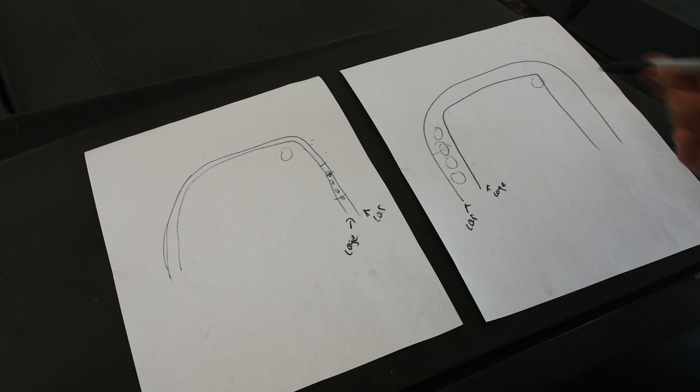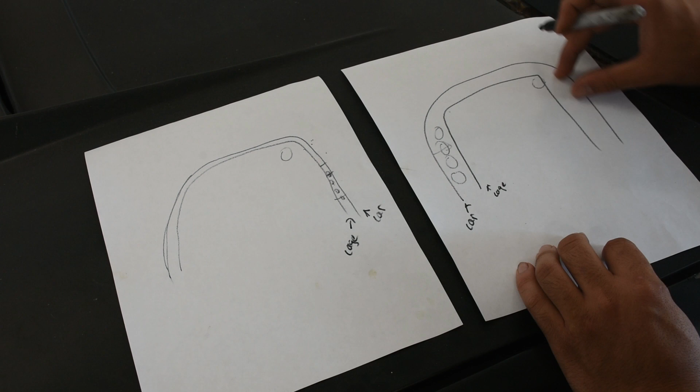Number two, as far as the rigidity of the car, if you're having a big gap over here and you have to cover it with these huge dimple die gussets, which, by the way, not to point any fingers, but a lot of you guys think huge dimple die gussets are cool, but it's the opposite. When you see huge dimple die gussets on a main hoop, you know that cage fits horribly. The smaller your dimple die gussets, the better it is, because that means the tighter the cage is fitting. And of course, the tighter it fits, the smaller the gusset. The smaller the gusset is, the stronger it's going to end up being.

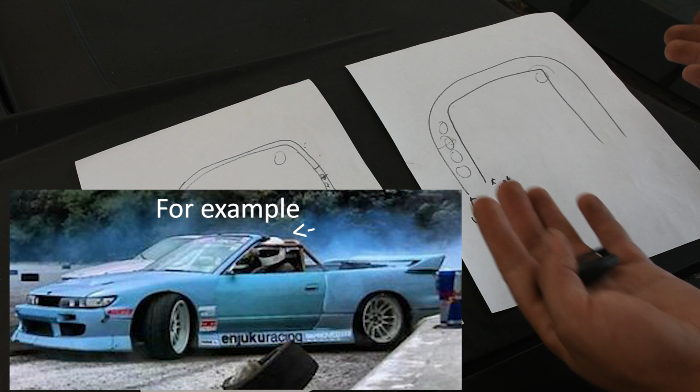Also, a lot of times I've seen cages where their main hoop has this huge gap over here, and when you actually look, the driver's head actually ends up sticking out above the main hoop, which, how does that make any sense, that in a rollover the driver's head is going to end up hitting before the main hoop starts protecting? Doesn't make any sense. So basically, something to note is when you're making your main hoop, you want to make it tuck up as tight as possible to the body of your car, where you can still actually fully weld around it.

So now that the rules have been covered and the whole fitment issue has been covered, the next thing is going to be covering the templates. So when I'm making my main hoop, I have templates made for everything on my bender. You should do this too. I start all of my bends at a certain point, and so I have a starting point on each of these things to reference off of. Then I bend them each to a certain degree. So this one's 60, this one's a 30, this one down here is a 45-degree bend.

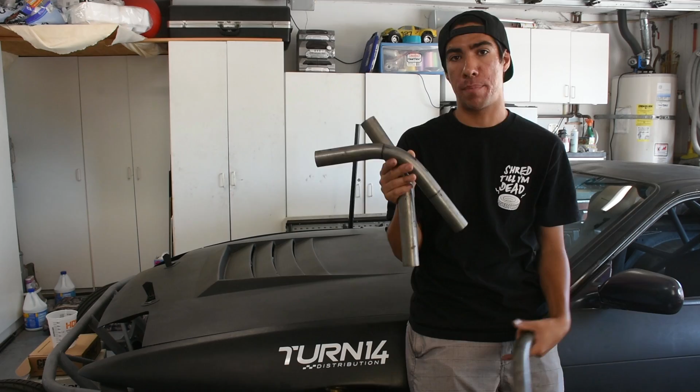And now I can put these up into my car and actually reference them to see how much of an angle I'm going to need to put into my main hoop in all the different places. And then based off of that, I can take the measurement and I know where to start my bends. So with those templates, I'm going to put them into the car, and then see how wide, how tall the main hoop needs to be, and where the bends need to be on the main hoop.

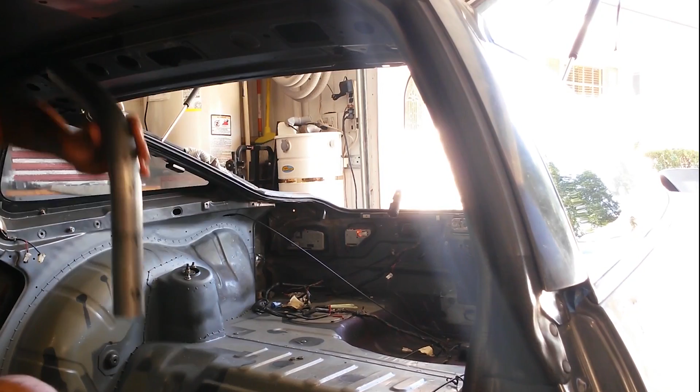The idea behind that is I can come over here with my 60-degree piece and see how it lines up with the shape of the body, and a 60-degree looks pretty good up here. And so now I can just measure to the center over here and figure out where I need to start my bend on my die.

And so then that way I can get the bend exactly to match up with how I want it to sit over here, which is about 3 feet here. Then with those measurements taken, I can then transfer it to the actual big piece of tubing that I'm going to be using for the main hoop and get started on bending it.

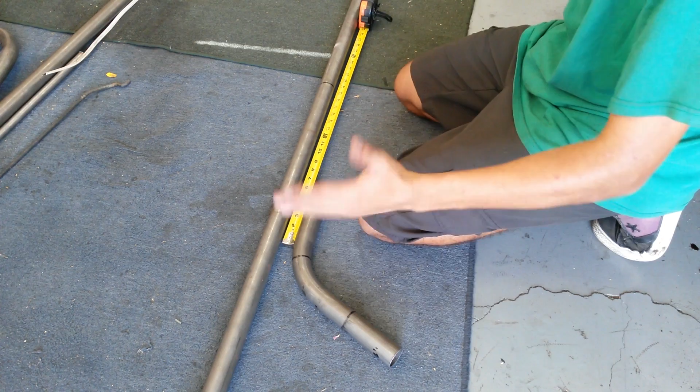Just going to mark the halfway point. Okay, so I measured approximately 3 feet across until I wanted the bend to start, and the bend to start is over here, mark right there. That's where I can go ahead and put that into my die and get the bend I want.

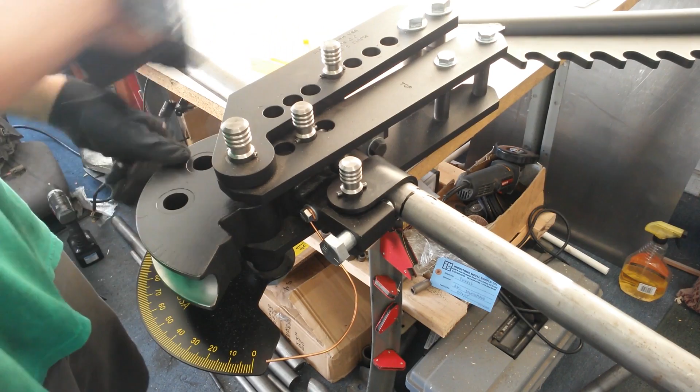Okay, this is a JD squared 4.5-inch radius die, 180-degree bend. That is the tightest radius that you can get with this roll cage material. Also in the FD Tech book, there is a regulation that your radius cannot be less than 3 times your tubing diameter. My tubing diameter is 1.5 inch. 1.5 times 3 is 4.5 inch. So you can't go below a 4.5 inch radius. This is a 4.5 inch radius die.

And so the reason that you get the smallest you can, essentially, for doing roll cages is so you can have the tightest fitment cage possible. You don't want to get a 5.5 inch or a 6.5 inch die, because your hoops are going to just be so ridiculously big.

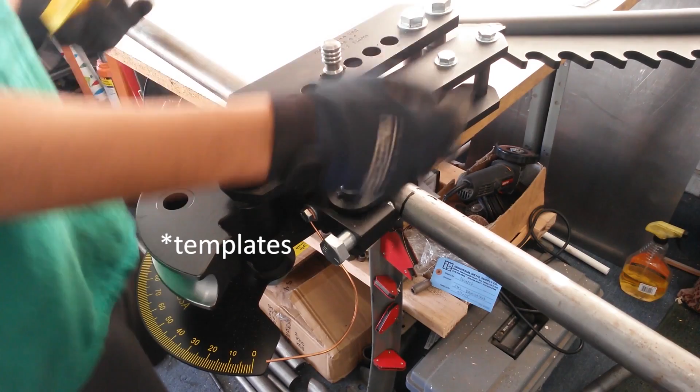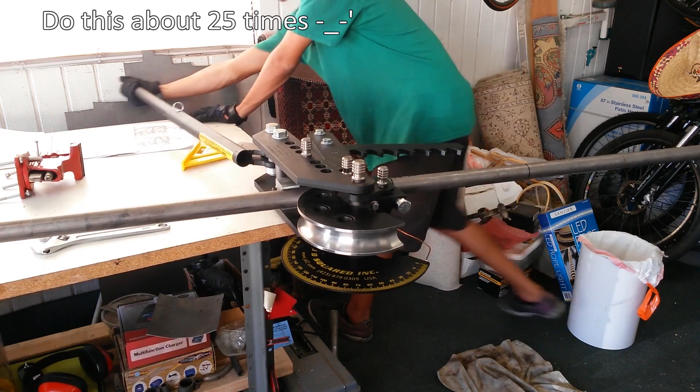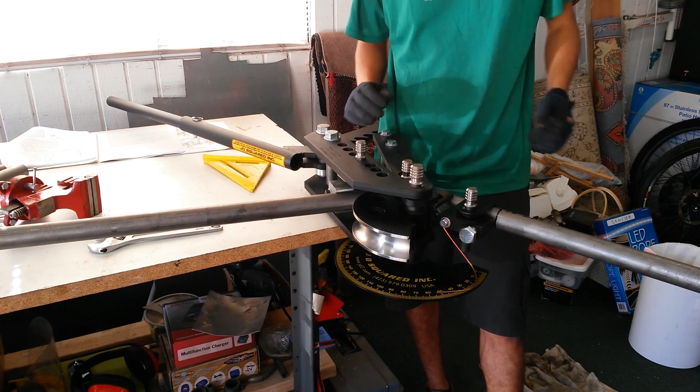So over here, it just has to line up with the mark. That's where I start all my dies, and that's how I know where all the bends go, and the approximation for everything. So based off of that, now I can bend this tube. Alright, right now it's about 56 degrees. What I'm going to do is take it out and then check it inside the car for fitment.

So for the first bend on the tube, I did it less than what I actually needed, and the reason behind that is I can always go back and bend the tubing more, but you can't go back and undo your bend. So if you're not really sure about what bend you want to do, if it's going to be a 60 or 55, go with the 55 first and then bump it up to a 60 later on after you see you need to make it a tighter angle.

Oh yeah, beautiful, beautiful. How am I supposed to freaking test fit this, huh?

Looks about right, Jimmy. Moving on to the second bend on the main hoop, I have to make sure that the tube is actually all leveled out and on the same plane. If your main hoop is rotated and you begin your second bend, you're going to end up with the legs of your main hoop going off in two different directions. So you have to make sure everything is on the same plane.

Now, what I just recently found out after building the whole entire roll cage is that they actually sell rotation gauges, and these can clamp onto your tube. You zero it out, you can do your first bend, and now you know that it's zero when doing your first bend, you can go do your second bend and zero it out again with the rotation gauge, so you know that it's all in the same plane.

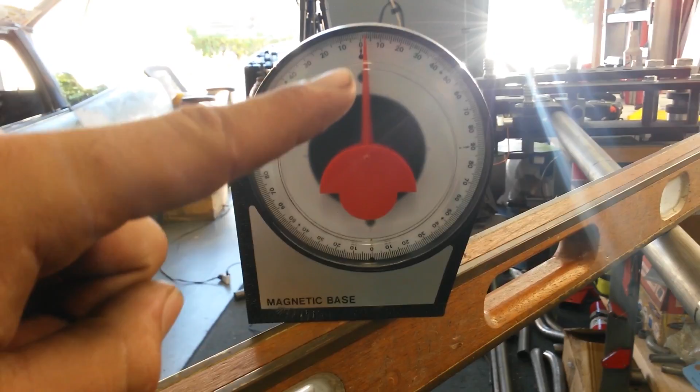I didn't do that, however, so the method I used was just using a piece of wood over the two different areas across the bend, and using my angle finder and getting the angle over there, making sure that it was the same angle that I was getting across my die. So two ways to do it, although I recommend getting a rotation gauge. Tube bender workout part 2.

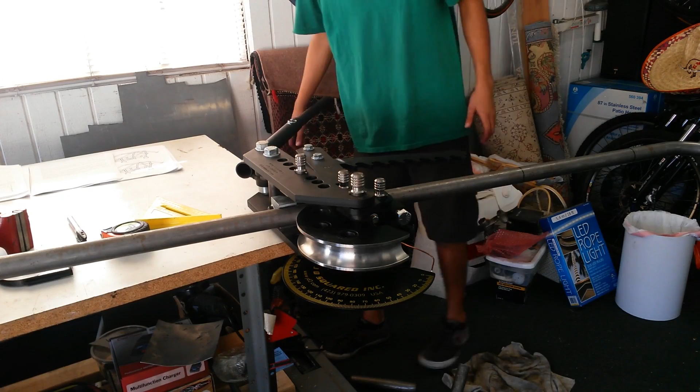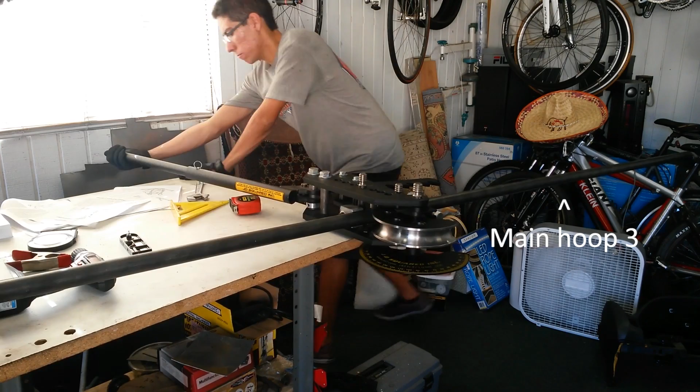So honestly, I ended up making the main hoop 3 different times. So each piece is 10 foot, and my average price is usually $2.70 a foot. So about $27 for each main hoop that I make. That means I'm just under $90 for making 3 different main hoops.

Now, to me, it's a lot better to make 3 different main hoops and get the fitment perfect and get it exactly how you want it to, rather than just making it one time to save yourself about $60. Now that's a big difference too with a lot of shops, because shops are out there to maximize their profit and to take as little time as possible doing something. So are they going to go back there and do your main hoop 3 times in order to get the best fitting cage possible? Probably not.

No, what they're going to do is they're going to cut it and make your gap super big, so that way they know it fits and they can do it in one try, and they can do it with one piece of hoop, save themselves $60 and a few hours of work, but then they're going to give you a subpar product. Again, I like doing it myself because I know I can take that extra $60 and make a few different main hoops and get my fitment on point.

Again, something that you should do as well. Well, I'm not saying you have to do it, but it's probably good practice. That's it.

When I finally had the 2 top bends in place, I then moved on to doing the 2 lower bends. I estimated once again using the templates, transferred those to the main hoop, and then did my 2 lower bends.

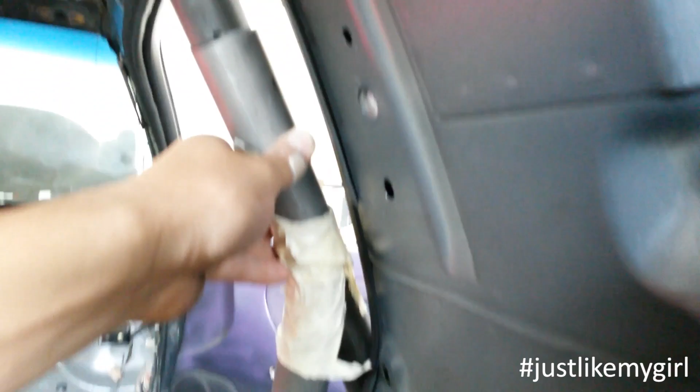Alright, so with the help of a friend, we're fitting up the top of the cage, and I'm just using my 30-degree template to see where to put that bend at. So it's looking like about right here is going to be okay, and give us the room that we need to weld around the bottom. That's the clearance on the top. It's going to be super tight. So 9 5/16.

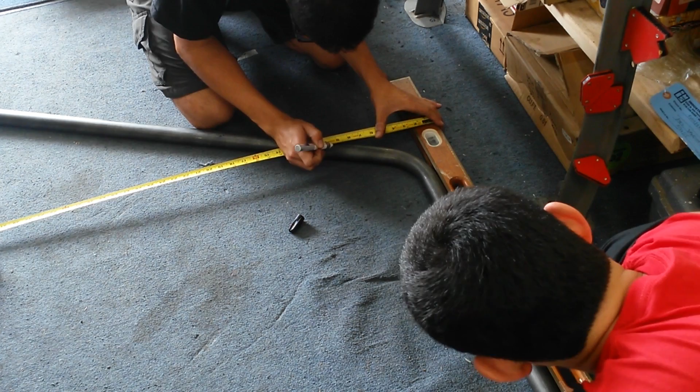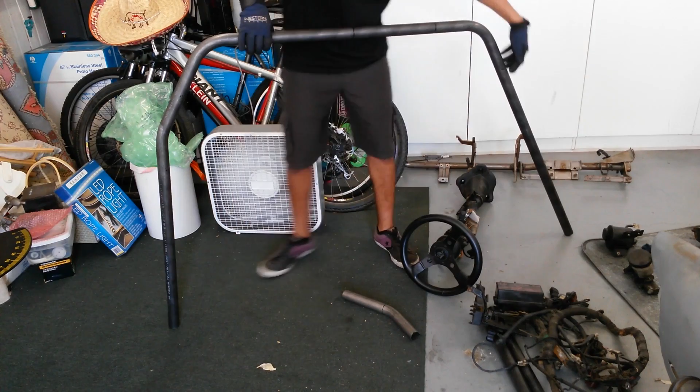So now you can see this was without the bend over here. This was with the bend. This is just a 25-degree bend. I want to total it to 30, but we just put 25 just so we can see how everything lines up. Maybe we'll add in more degrees over here. See how it goes. Yep.

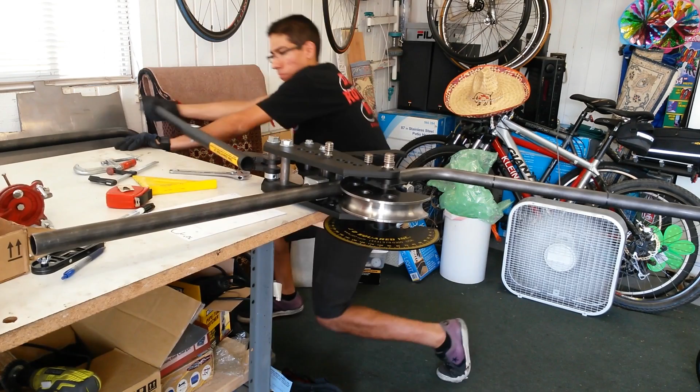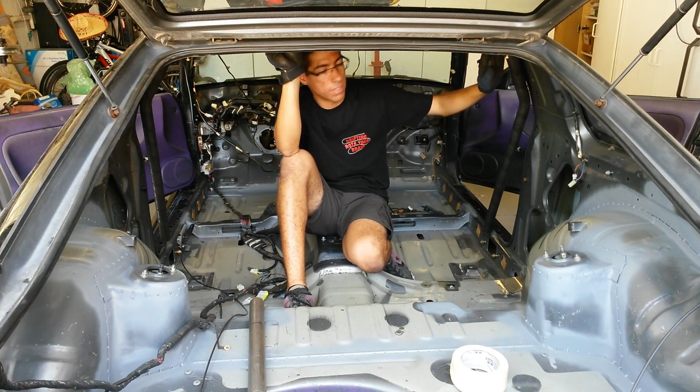Okay, so basically here's the main hoop now. This has a 25-degree bend on it. The top has a 60. And so this is kind of the fitment we're getting, and now we kind of just need to adjust the bends accordingly and then trim off the bottoms and get it to fit.

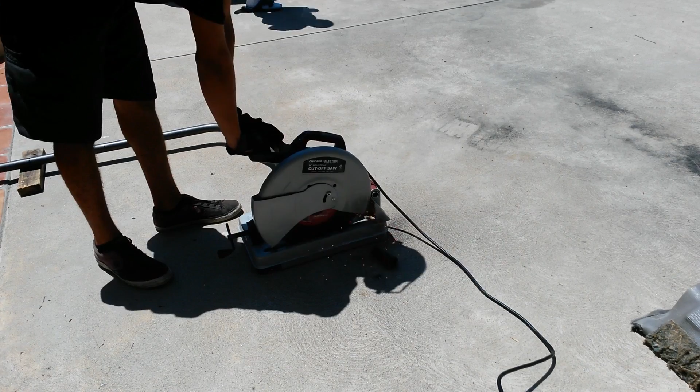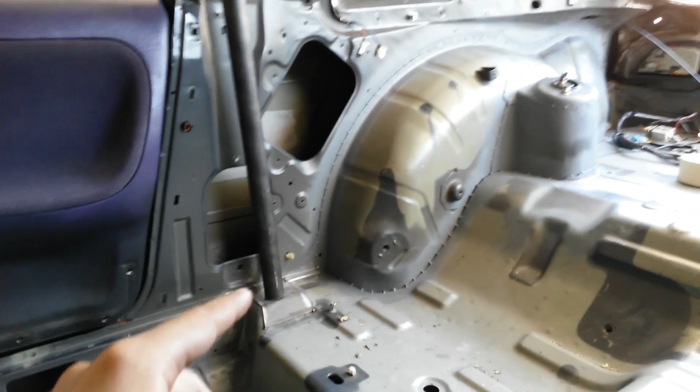Okay, so now we just put in the 28-degree bends over here; there's 60s at the top. This is what we're looking at. Now just a matter of trimming the bottom to size, and then slowly inching it back to where we want it, and then tacking it in place.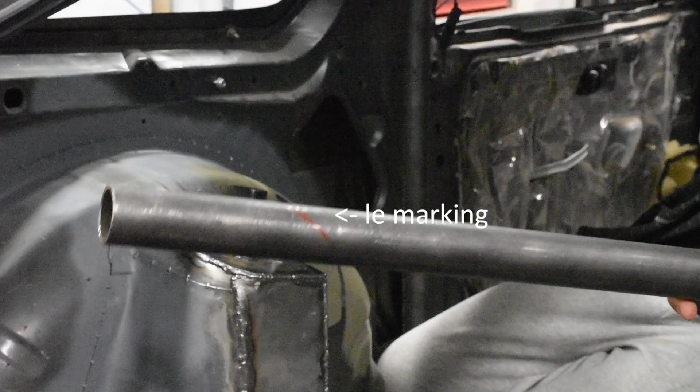And then I kind of just took a marker right here, and you can just draw straight up. And that's how I found a rough angle for what my notch needed to be at down here. So then with that, I have a line drawn here, and that's going to be where my cut needs to be and the rough angle that it needs to be at. That took care of the bottom notch on the rear support that goes to the base plate.

Next up was to notch the top of the rear support that goes to the actual main hoop. Now what I use for all of my notching is a website called Metal Geek. I'll show you that right now. But basically that's going to give you your template on how you need to notch it, and you can just notch that with your basic angle grinder with a cutoff disc as well as a flap disc on there.

I've used tube notchers before. I've used the whole hand drawing method of notching it, and then I've used the Metal Geek method. And Metal Geek is honestly the cheapest and best way to do it, because when you have a 7-foot side hoop that you got to notch, it doesn't matter if you have a $300 notcher. You trying to line up a 7-foot long piece of metal into a tube notcher mounted to a bench and then try and get a notch on there is not happening.

You actually having the template and being able to butt it up against the joint and get the perfect rotation on it, that's what's going to count. So I highly recommend using Metal Geek, cutting out the templates and using those for your actual notching.

Okay, so here I got my computer, right? And so this is how I'm going to do the notch. So you just go to this website, metalgeek.com/static/cope.pcgi, I guess. The link is going to be in the description for it.

So all you do is just enter the diameter of the cut tube, which is 1.5 inch, the wall thickness, which mine is 0.095, the diameter of tube number 2, which is 1.5 inch as well, and then the angle of it. 90 degrees would just be your standard angle. Mine's going to be a little bit offset just because the base plates are at an angle, so I'm going to do an 85 degree angle for it, and then you kind of just hit calculate,

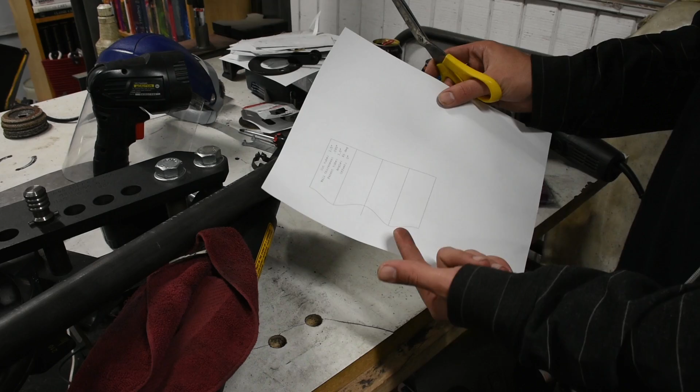and then it gives you your pattern right here, and you can just click PDF, and then you just Ctrl+P that. Oh yeah, when it says fit to page, don't fit it to page, because if you do, it's going to end up coming out smaller than what it should. So then all you do is just print that, and then you've got your template. You just cut it out and wrap it around the tube. So here's the template, printed out on a piece of paper, take scissors, and then I'm going to cut it out.

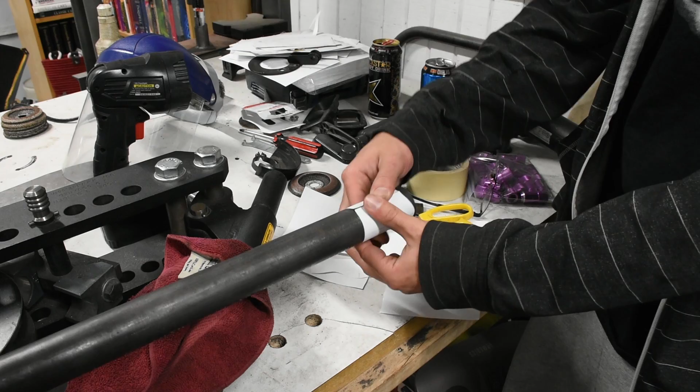Now that you have your template cut out, what you do is you wrap it around the end of your tube, and you just line up the edges, which would line up right there, and you tape them together, and there you have your notch that you need to do. So really the hard part is just lining it up how you want, and then after that it's pretty easy. You just hit it with an angle grinder with a flap disc.

So I'm going to take my rear support right here, I'm going to put it up to the rear base plate, make sure the notch is flat. I'm going to push this against my main hoop. I can basically eyeball where this is roughly going to be, and then based on that, that's where I get to tape up my template and then cut it out for this notch.

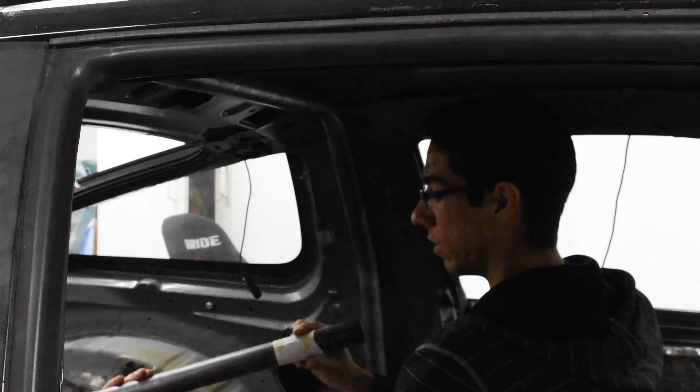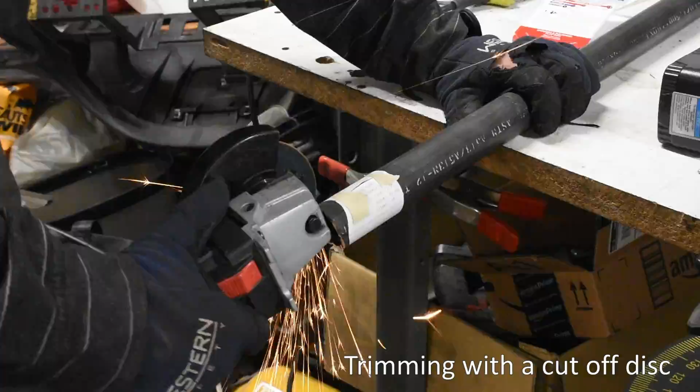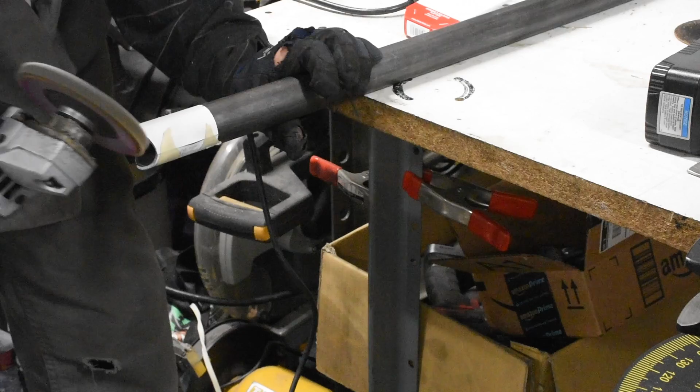Now what I like to do on these templates is actually start out kind of high, and that way it gives me some room for error, so I can keep trimming it back and adjusting how this template fits on there, so I can actually get it to a perfect fit. So I continue doing that until I get the notch in the tube to fit right.

Once everything is checked, I can then prep the tubes by removing the mill scale as well as beveling all the edges. Another thing that I'll do to prep is I'll take a piece of cloth and shove it into the tubing and run it down with a broomstick or a smaller tubing in order to clear out all the debris in here. That's another thing that a lot of shops don't do, and that's actually going to make up quite a bit of weight by the time you do your entire roll cage.

Not only that, but these are pieces of metal that are in here, and depending on how big the chunks are, if you weld everything in place, by the time you start driving it, you might get little tingling sounds everywhere, because you're going to have little pieces of metal in here because some shop didn't actually clean all their tubes before welding them in place.

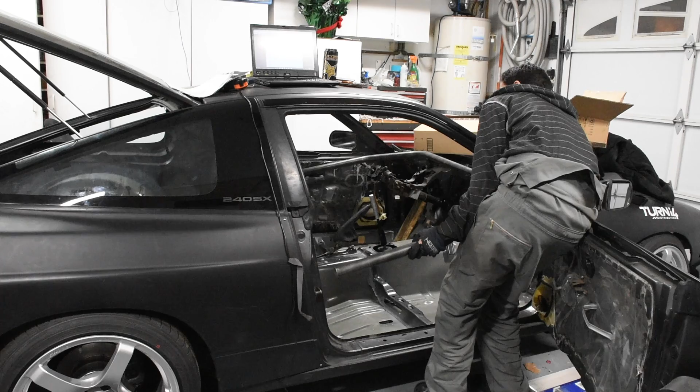All right, once everything is actually prepped, then I can mock it up in the car and tack weld everything in place. And of course, we're just tack welding for right now. Everything will be fully welded once all the rest of the pieces are in the cage, just in case anything needs to be redone or have adjustments made to it.

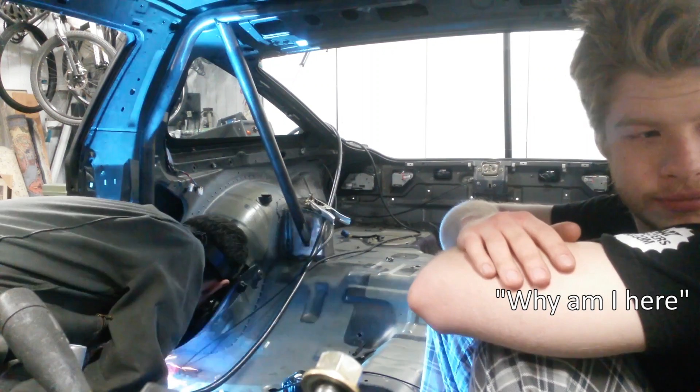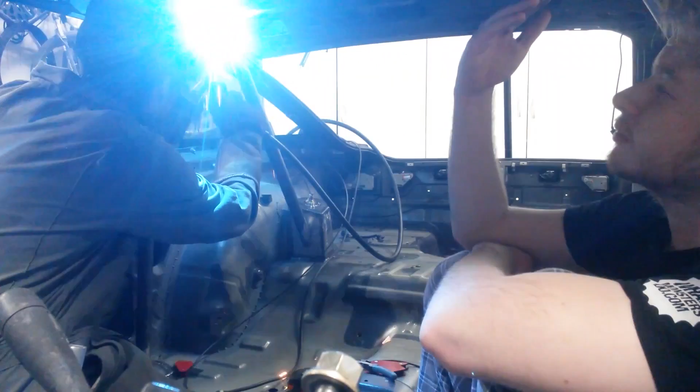Dude. Hey, look at it from here, though. Look at it from here. Look at it.

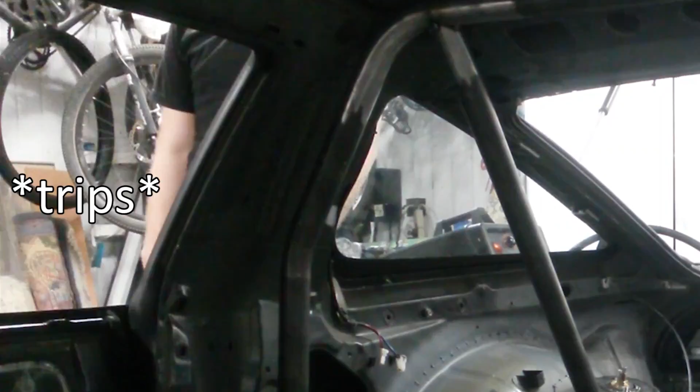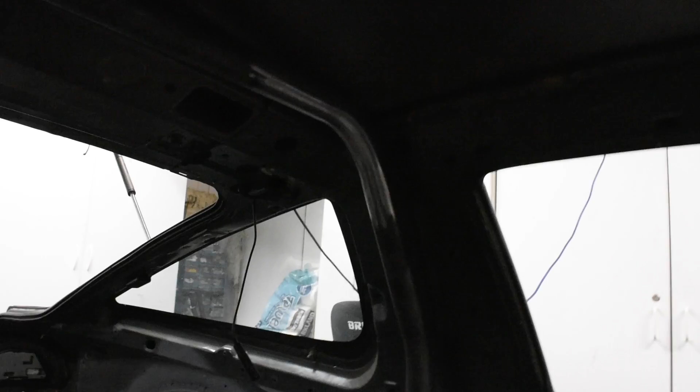Damn! Okay, so as you can see, we have the main hoop tacked into place. Rear support tacked in there. Okay, notice the spacing where the main hoop is. If you look over on the opposite side, the spacing is off. Now, that's just because when you bend material, especially when you're using just a bench like that, it's really hard to get all the bends super even. I try and get them as even as possible, but they end up being maybe a degree or two off, and that's gonna cause your leg to come down in a different area.

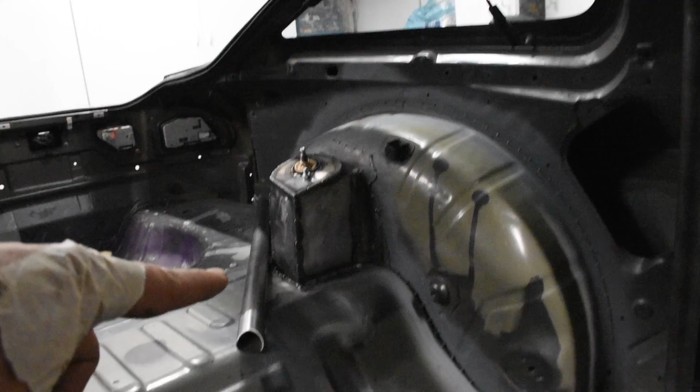What we're gonna do is weld the rear support in the same exact spot back here. We're gonna weld it to the same exact spot up there, and then that leg is gonna be just a little bit uneven on the base. And then once the top is welded in, we're basically just gonna pull it forward and then tack it in place. So this way we're gonna end up having a perfect cage fitment, even though the cage is just naturally not bent 100% level, because that's a challenge in and of itself.

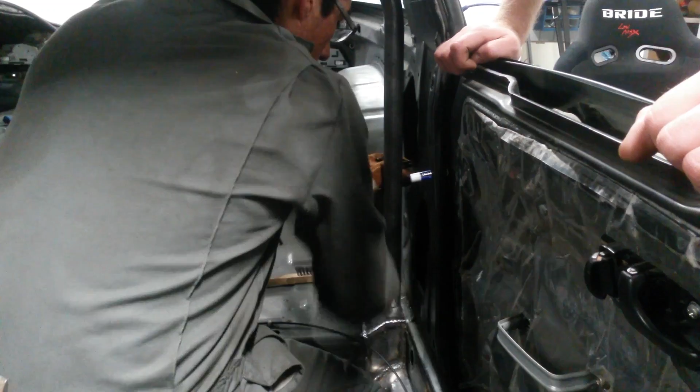Go. Go for two. Can you let go? There we go.

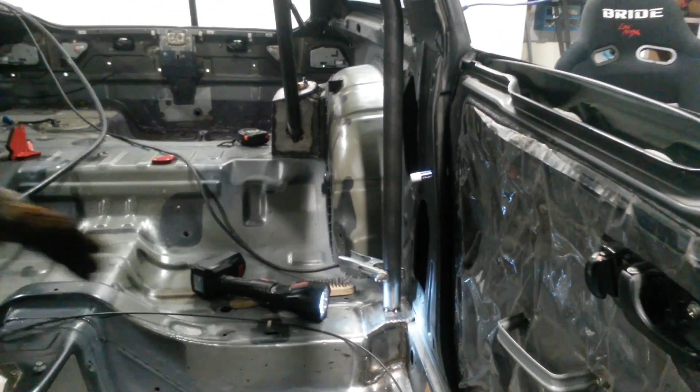Okay, cage is done. Cage is done. Wrap it up. Built. Built my butt. Hashtag forged. Hashtag BC. Brian Crower, Stroker. Cage is done.

Yeah, the cage is actually done, so you can see how the main hoop came out. You can see how tight it tucks up and how much headroom it gives, and how high it tucks up, so the driver's head is not affected by this at all. And actually, there's about a one finger gap to the roof over here, not even. Over here it gets to like half a finger, in the center it's about a finger.

Notice the angle matches the arc of the car right here. This comes down right around there, which is gonna give me enough room to weld. I could have come out farther, but then I don't get enough room to weld down there, so that's as far as I could make it come out.

And I purposely had my bend a little bit higher too, because if I would have had my bend here, this tube would have come cutting across like so and would have taken away more room from the driver's head. So I purposely made my bend a little bit higher, right where I wanted to weld, to match the line of the roof and maximize as much headroom as I possibly could for the driver. So I want to show you how closely that thing tucks up and goes behind.

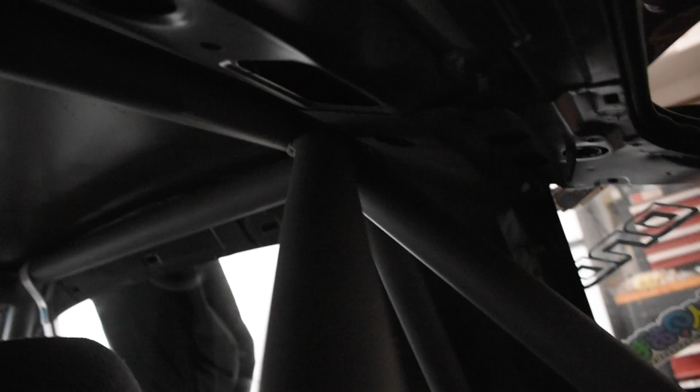Another thing to look at is how far I pushed it back, and I pushed it back as far as I possibly could, so I can give myself as much headroom as I could, because I'm a tall person. So I wanted this main hoop basically behind me, rather than like a lot of people that have it right over top of their head, which I don't want because I can hit my head on it.

Something you're not going to be able to see that well, but here's my rear support, here's my main hoop, and I tucked this thing up so hard that I can actually weld my rear support to the roof structure itself, so that's going to make for an extremely strong cage. This cage can't move back any, because it's actually going to hit the structure of the roof. So like I said, that's going to make for an extremely strong cage, and you can tell how little gap I have along the side too.

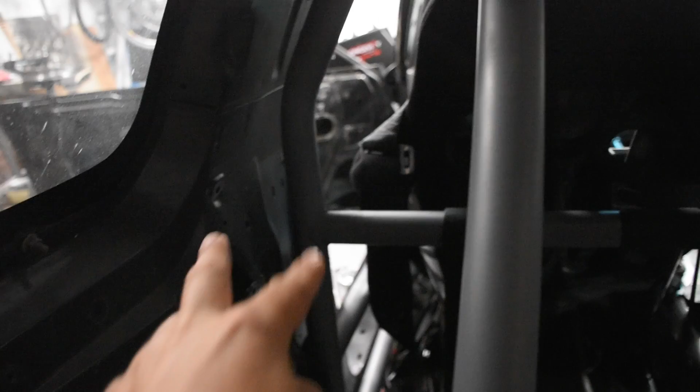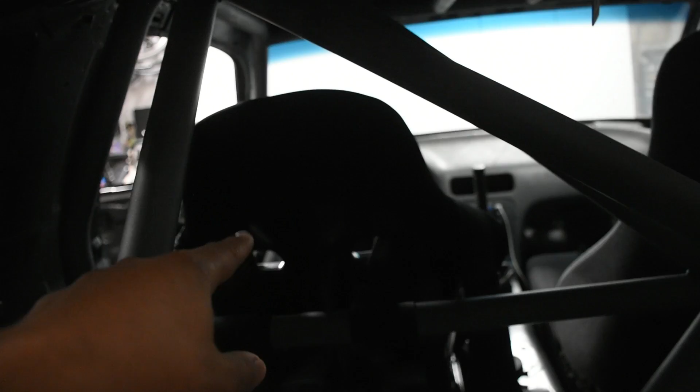It's not going to be some super huge dimple dies, they're going to be super small. I just gave myself barely enough room to weld. That's all I did. Maximized it as tight as I could possibly make it. You can see again how much headroom I got, and this actually needs to go to a lower seat mount, so there's going to be a lot more headroom too.

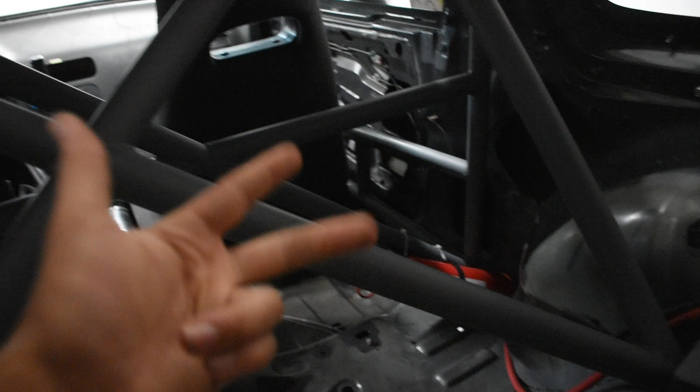So again, big emphasis on tucking up the cage and having nice fitment, because that's what's going to separate a cheap cage from a good cage: the welds, the overall thought process of it, and of course how hard it tucks.

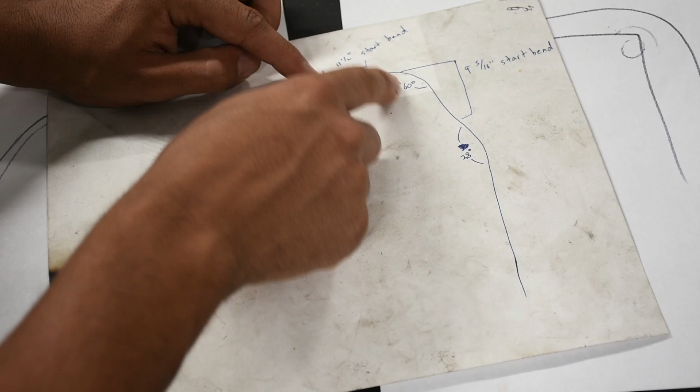With that exact main hoop, these are the dimensions for it. It's going to be 11.5 inches from the center to the start of this 60-degree bend. Then after that 60-degree bend, it's going to be 9 5/16 inch down for the start of this 28-degree bend. And that's basically it. Then just trim the bottom to fit.

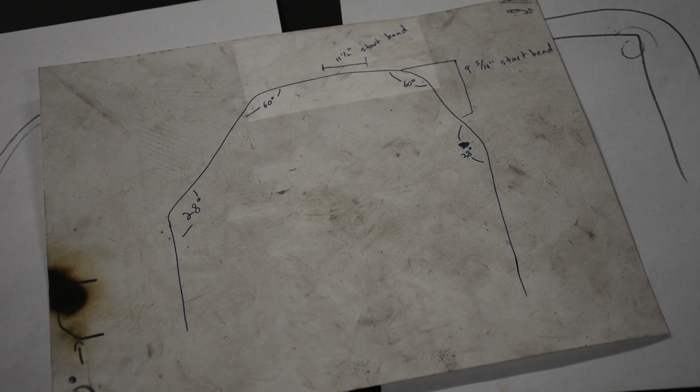And on that chart, when I say start of the bend, I mean at this mark right here. So 11.5 inches from the center until this point, and then that bend starts. There you go. So in case you're lazy and you just want to copy mine, that's how you do it. And ta-da, that's it for the main hoop and rear supports. So the next thing we're going to be covering is the side hoops.